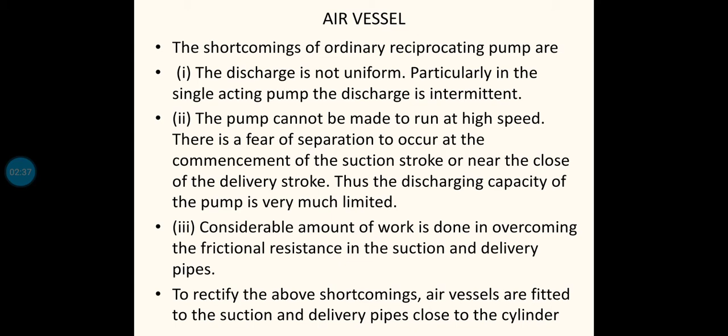To rectify the above shortcomings, air vessels are fitted to the suction and delivery pipe close to the cylinder. This is the figure showing the reciprocating pump fitted with air vessels. You can see this is one air vessel fitted at the suction side, and this one is the air vessel fitted at the delivery side. You can see from the figure both the air vessels are fitted very close to the cylinder. This is the cylinder of the reciprocating pump.

Actually, an air vessel is a cast iron cylinder having a very small opening at the bottom portion. See here, at the bottom portion we have a small opening through which the water, or whatever liquid is pumped, can enter into the chamber. Some air is trapped in the top portion of the chamber. So as the water level in the air vessel increases, that will compress the air trapped in the upper portion.

So once the pressure in the delivery pipe is more, the water will enter into the air vessel, and that will compress the air inside it. Once the pressure falls, this compressed air will push back the water into the pipe. During high pressure, the water inside the chamber will compress the air trapped here. During low pressure, the compressed air, using its pressure, will push back the water to the pipe. I think it is clear for you.

Now, an air vessel is an inverted cast iron chamber with an opening at its lower end through which the water can flow. As the water level in the air vessel rises, the air trapped in the upper region gets compressed, and this compressed air will force out the water when the pressure of the water falls. We know acceleration pressure depends on the length of the accelerated column of water.

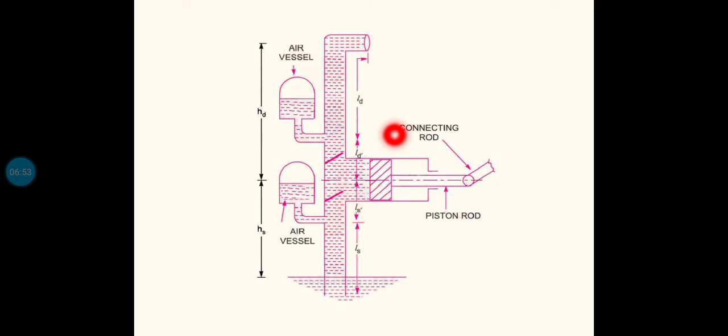Similarly, in the delivery side, while calculating the HAD, we have LD by G, A by AD. So that LD term is there. Now that LD term is reduced to LD dash, because the variation of flow velocity is only in this region. That means that HAD also is eliminated. So indirectly by fitting air vessel, we can completely eliminate the acceleration head, the pressure head inside the cylinder due to the acceleration of the piston. That is what is explained here.

We know that the acceleration pressure depends on the length of the accelerated column of the water. By fitting air vessel to the suction and delivery pipes close to the cylinder, the length of the accelerated column of water is reduced. In the remaining part of suction and delivery pipe, flow velocity will be uniform. So HAD and HAS are completely eliminated by fitting the air vessel. We will show it in the derivation, don't worry.

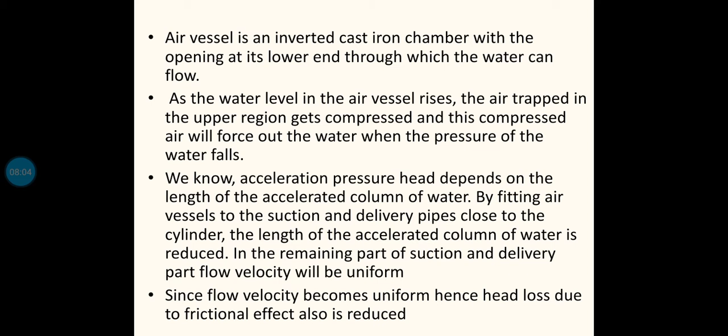Now thinking about the frictional effect, since the flow velocity becomes uniform in the delivery pipe as well as the suction pipe, we are calculating the head loss due to friction by the flow velocity in the cylinder. Actually the flow velocity has dependency on the theta crank angle, but by fitting air vessel, the flow velocity becomes uniform. That means we will be calculating the HF value with the uniform velocity, that will be always less than the HF calculated by the varying velocity. So that also we will see in the upcoming topics.

So anyway, by fitting air vessel, the work done can be reduced, and HAD, HAS can be completely eliminated. Those are the two advantages. Now talking about the working, during the first half of the suction stroke, piston will have an acceleration, that I have already told. So usually the entire water in the suction pipe will have the acceleration. Acceleration means velocity is increasing gradually, change in velocity should be there. Positive acceleration means velocity increases.

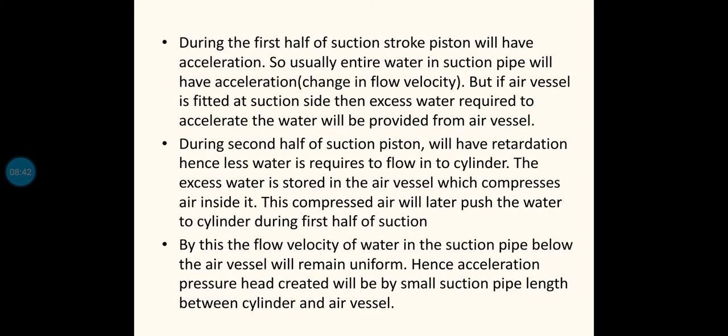But if the air vessel is fitted at the suction side, then the excess water required to accelerate the water will be provided from the air vessel. Now we know that during the initial stroke, that is theta equals 0, piston is at the left extreme position. From here the piston is moving backward till the theta equal 90 degree position, that is middle of the stroke, the piston should have the acceleration. So if the piston is having acceleration, the water inside this cylinder also should have the same acceleration.

The piston is having increased velocity, so the flow also should have increased velocity, but we want to keep the velocity at the lower portion, at this suction pipe, uniform. It should not increase based on the velocity increase of the piston.

So what we will do is assume that initially the air inside this chamber is compressed, so that excess water required to accelerate the piston is supplied. If the velocity is increased, what is happening? Q is equal to area into velocity. So if the velocity increases, more discharge is required into the cylinder, and that excess water required into the cylinder is provided from this air vessel.

So up to here, below this air vessel, the suction pipe will have uniform velocity, but from this point to the cylinder side we will have more discharge. Here discharge is less. From here we are providing some quantity of water, so this plus the water coming from the air vessel enters the cylinder. That excess quantity from the air vessel provides the extra velocity to the piston. So even though the piston has more velocity, that won't affect the water flowing through the suction pipe. By that way we can maintain the velocity inside the suction pipe.

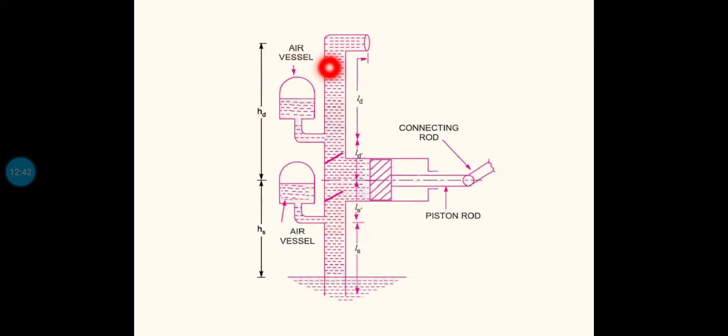During the next half revolution, the piston will have retardation. At that time the water flowing through this pipe will be less, so the stored water in the air vessel is supplied to the delivery pipe to maintain the flow here constant. So always the velocity of flow in the delivery pipe and the suction pipe will be uniform.

Here the concept is entirely different. Think about it. On the suction side, during the first half of the revolution, when the piston is accelerating, water is taken from the air vessel, whereas on the delivery side, when the piston is accelerating, water is stored in the air vessel. And on the suction side, when the piston has retardation in the second half, water is stored in the air vessel, whereas on the delivery side, during retardation, extra water is provided from the air vessel.

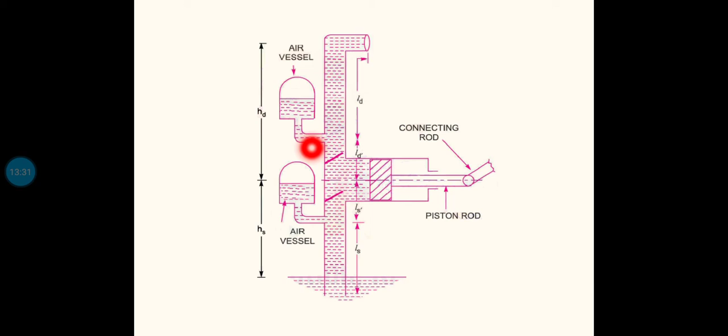So whatever happens inside the air vessel on the suction side is just opposite to the flow of water in the air vessel on the delivery side. Think about it clearly, and I think the idea will be clear for you. In the next presentation we will see the derivation.